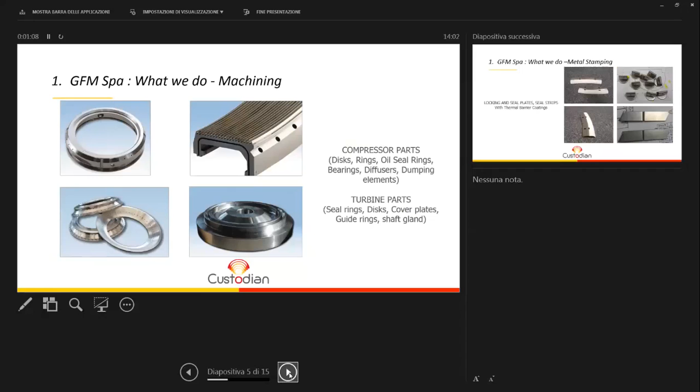Yes, we are. Okay. So, as I told you before, GFM is a company involved in the manufacturing of components for gas and steam turbines, and we produce compressor parts or turbine parts, like disc rings, oil seal rings, seal rings, and cover plates. The company has about 80 employees, and our turnover is more or less 30 million per year. We are specialized in machining of all different materials, but we are also able to produce components by metal stamping.

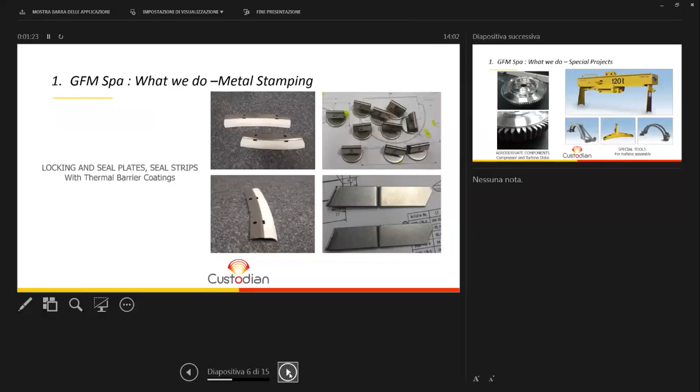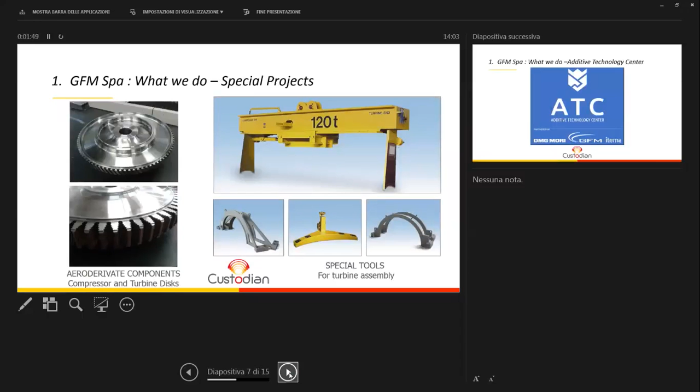We produce a lot of components like seal plates and seal strips for the combustion chamber, with special coatings like thermal barrier coatings. We are also able to produce components and jigs for the assembly of the turbine, and to conduct special projects in the power gen and aeronautical sector, and we have also produced special discs, like you can see on the left of the screen, for aeroderivative turbines.

GFM is interested in innovation. For this reason, GFM attends different funded projects coming from national or international partnerships. Three years ago, GFM started a collaboration with DMG Mori and Itema in the foundation of the Additive Technology Center, a center dedicated to promoting additive technologies in different industry sectors, among them the power gen and aeronautical sector.

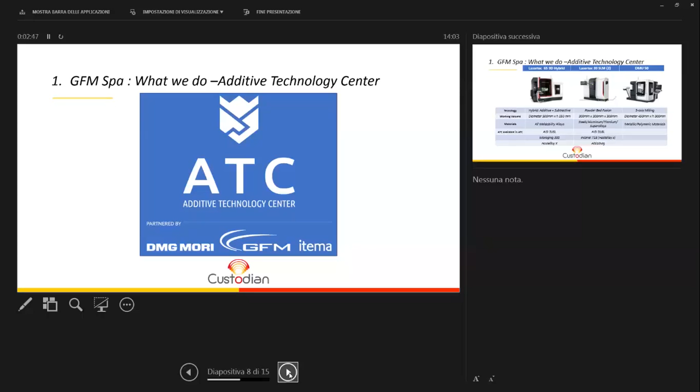DMG Mori is a well-known company that produces CNC machines, and in our Additive Technology Center we have different technologies. We have the hybrid technology with the Lasertec 65 3D machine, one of the first machines on the market with hybrid technology. So we are able to do subtractive with a 5-axis milling machine and additive with the laser cladding head in the same machine, to manufacture new composite components. We also have powder bed fusion technology with 2 SLM, and we can finish SLM components with a 5-axis milling machine.

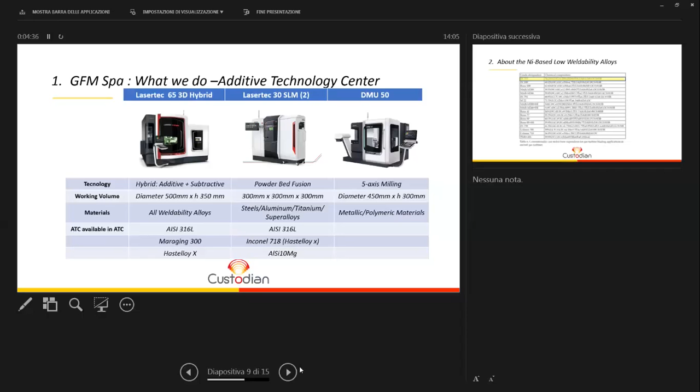The center is able to carry out feasibility studies and research and development projects in order to increase the manufacturing capability of GFM. We are working on standard materials like stainless steel, Maraging M300, Hastelloy, aluminum, and Inconel 718 for the SLM. But we want to increase our capability because some of our components are made of different alloys. In particular, we are interested in the nickel-based superalloys that we machine, but in some cases we need complex shapes, so we want to exploit additive manufacturing to manufacture these components.

But as you can see, some of the components that we produce... Francesco, I can't hear you right now. Are listed in the pictures that you can see. For example, we have... Yes, now I hear you. It was kind of interrupted, but now I hear you again. Okay.

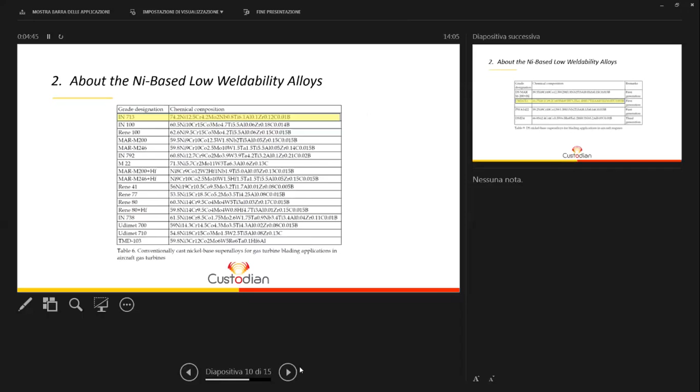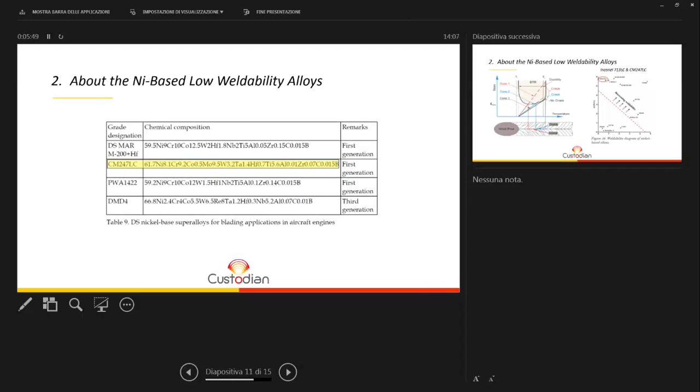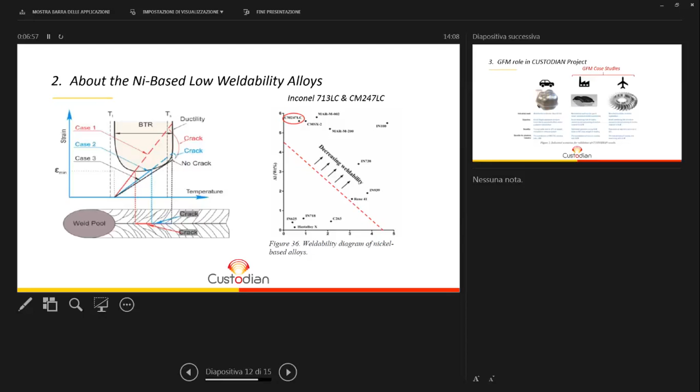This low weldability, as you probably understood from the previous presentation, is an issue due to the high cooling rates of powder bed fusion techniques. The aim of the Custodian project is to reduce and control the thermal evolution during the process in order to reduce crack formation. So GFM has selected two case studies for this project in order to evaluate the results of the Custodian project.

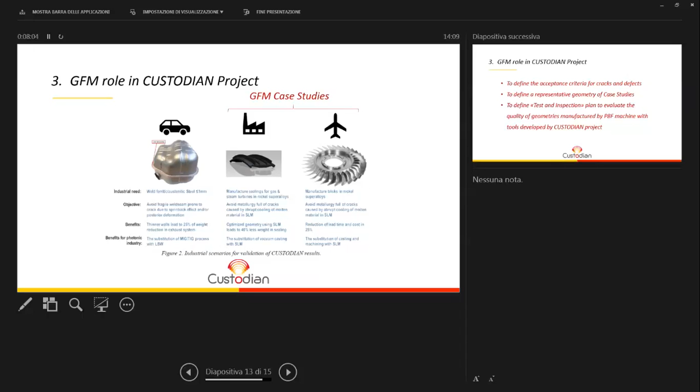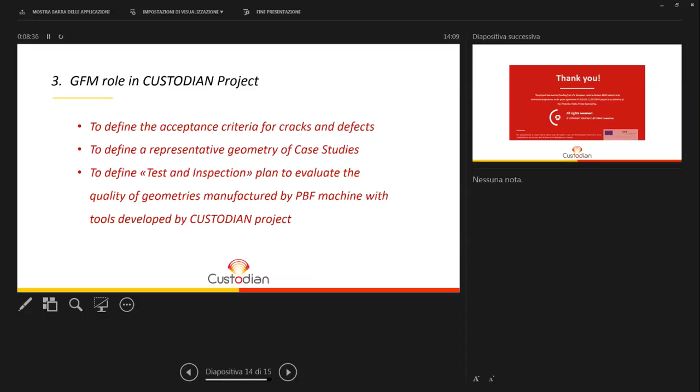We have selected two components: the seal for a gas turbine made of Inconel 713 low carbon, because we are interested in manufacturing complex parts, reducing the weight of the seals, and in this case we need to exploit additive manufacturing. In the project, we will define a representative geometry of the case studies in order to speed up the evaluation process. Then, at the end, we will define a test and inspection plan to evaluate the quality of geometries manufactured by powder bed fusion with the custom machine developed by the Custodian project. So keep in touch to see the results of the Custodian project, and thank you for your attention.